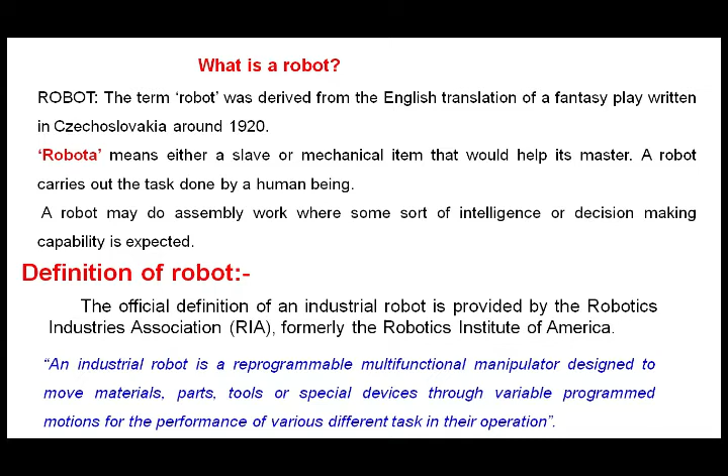This slide shows more definitions. Robot: any automatically operated machine that replaces human effort. It may not resemble human beings in operation, performance, or function in a human-like manner. By extension, robotics is an engineering discipline dealing with the design, construction and operation of robots.

One more definition: Robotics is the intersection of science, engineering and technology that produces machines called robots that substitute for human actions. The robot consists mainly of a mechanical arm tasked with welding or screwing on certain parts of a car. Today we see an evolved and expanded definition of robotics that includes the development, creation and use of robots that explore earth's harshest conditions, robots that assist law enforcement, and even robots that assist in almost every facet of healthcare.

Now I can explain the three laws of robots. These laws are applicable for designing a robot. These three laws of robotics were conceived in the 1920s by science fiction writer Isaac Asimov.

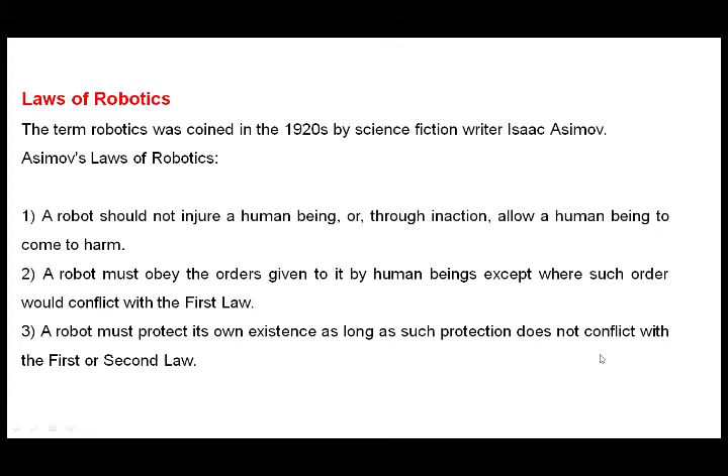Second law: a robot must obey orders given to it by human beings, except where such orders would conflict with the first law. Third law: a robot must protect its own existence, as long as such protection does not conflict with the first or second law.

What is the meaning of the first, second and third laws? The first rule is, if the job task is dull, dirty, difficult and dangerous, a human may not be able to do the job efficiently for hours. Therefore, the job is appropriate for automation or robotic labor.

The second law is the robot may not leave a human jobless; it must make our lives more enjoyable, not miserable. The third rule involves asking whether you can find people who are willing to do the job. If not, the job is for automation or robotics. These laws mean the use of robotics or automation must make short term and long term economic sense.

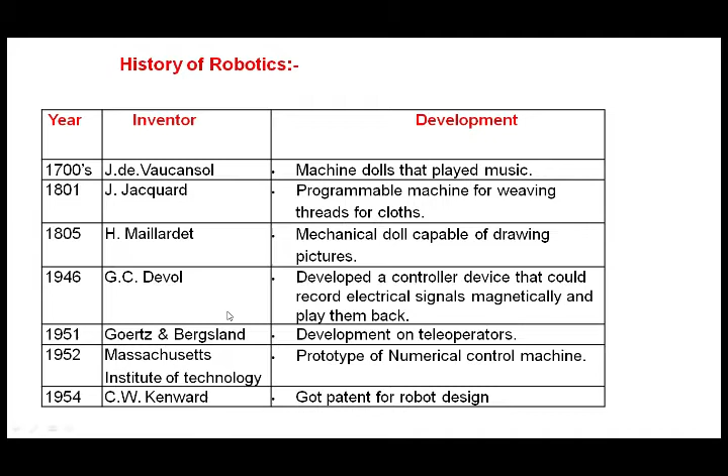This slide shows the history of robotics. In this table, inventor development is shown, explaining how the robot was designed with different specifications or upgrades done by different inventors from the 1700s to till date. You can observe the changes in the slide according to the years.

Next topic: anatomy of robot. What is the anatomy? Anatomy of a robot is also known as the structure of the robot, meaning what parts are there, external or internal. This arrangement or attachment of different parts is called anatomy. What parts are used in the robot is called anatomy.

The basic components or sections in anatomy of robot are as follows. The robot anatomy is concerned with the physical construction and characteristics of the body, arm and wrist, which are the base, fixed or mobile; the manipulator arm, which has several degrees of freedom; and the end effector or gripper, holding a part or tool.

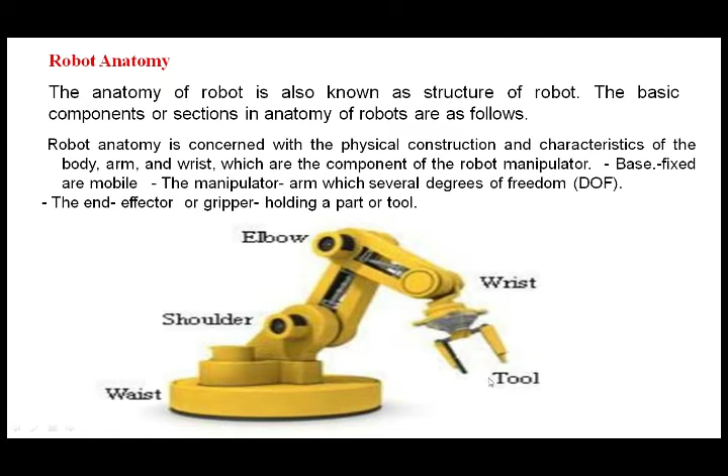In this figure, you can observe the different components visible: waist, shoulder, elbow, wrist, tool. Robot anatomy deals with the assembly of other components of a robot such as wrist, arm, end effectors, robot joints, manipulator, and kinematics. These parts are called robot anatomy.

First we discuss the 5 most important components. End effectors: the hand of a robot is considered as an end effector. The grippers and tools are the two significant types of end effectors. The grippers are used to pick and place an object, while the tools are used to carry out operations like spray painting, spot welding, etc. on a workpiece.

Robot joints. The joints in an industrial robot are helpful to perform sliding and rotating movements of a component. Next one is the manipulator. The manipulators of a robot are developed by the integration of links and joints. In the body and arm, it is applied for moving the tools in the work volume. It is also used in the wrist to adjust the tool.

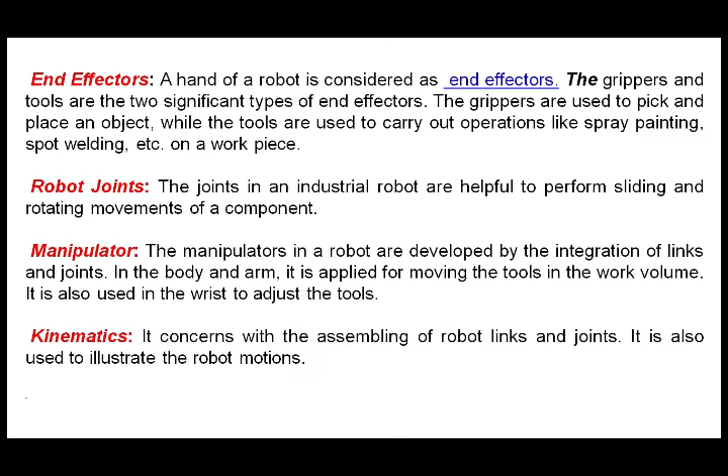One more definition: the manipulator is from the base up to the end effector. Whatever joints, links and parts are there, these assembled parts are called the manipulator. Kinematics. It concerns the assembling of robot links and joints. It is also used to illustrate the robot motions.

Next component, the locomotion devices. In the case of human beings, the power for the movement of the arm, the palm and fingers is provided by muscles. For the robot, power for the movement is provided by the motors. The motors used for providing locomotion in robots are of 3 types depending on the source of energy: electric, hydraulic, pneumatic.

Next component, the controller. The controller has both hardware and software and acts as a controller to the robot. The controller functions in a manner analogous to the human brain. With the help of these controllers, the robot is able to carry out the assigned tasks. The controller directs and controls the movement of the manipulator and the end effector. In other words, the controller controls the robot.

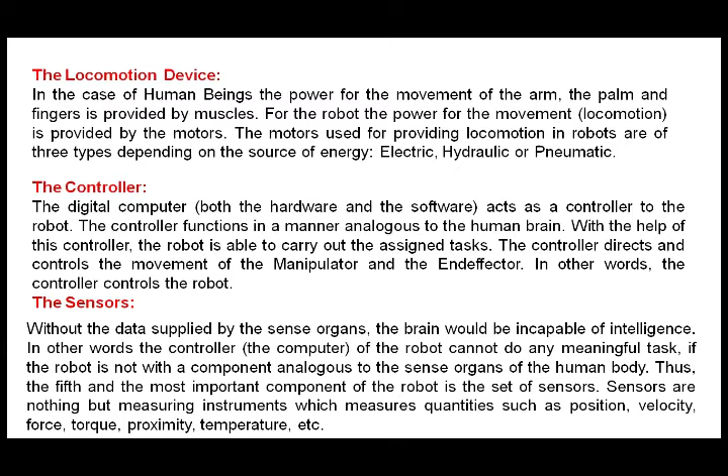Sensors. Without the data supplied by the sense organs, the brain would be incapable of intelligence. In other words, the controller of the robot cannot do any meaningful task if the robot is not equipped with a component analogous to the sense organs of the human body. Thus, the fifth and most important component of the robot is a set of sensors. Sensors are nothing but measuring instruments which measure quantities such as position, velocity, force, torque, proximity and temperature, etc.

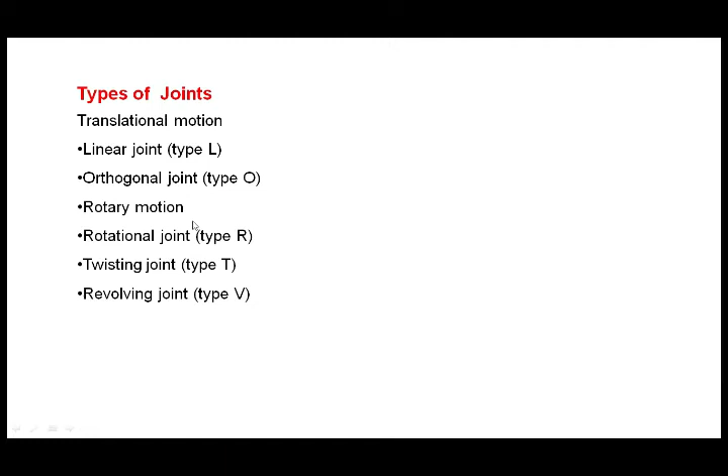Next components are the joints and links. This slide explains the different types of joints and links. First, what is the joint we discuss here? A joint provides the controlled relative movement between the input link and the output link. A robot link is the rigid component of the robot manipulator. Here: linear joint, rotary joint, rotational joint, twisting joint and revolving joint.

This slide shows the different types of joints. Practically all industrial robots have mechanical joints. They can be classified as the following types. The first one is the linear joint. In this linear joint, the relative movement of the input link and the output link is a translational sliding motion with the axes of the two links being parallel.

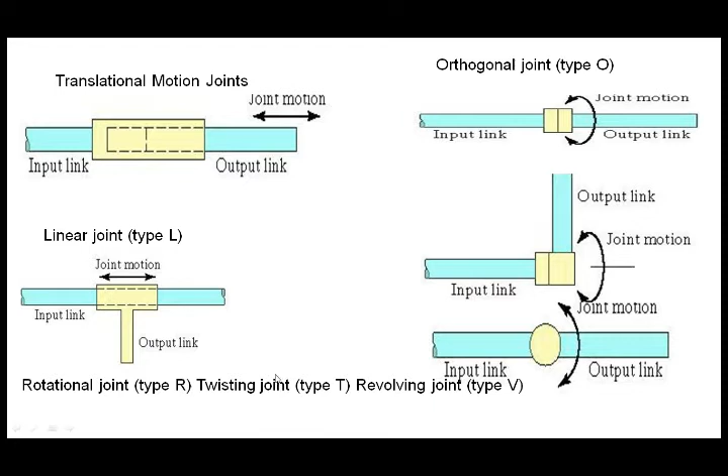This is the orthogonal joint. The input and output links are perpendicular to each other during the movement. Next, the rotational joint. This type provides a rotational relative motion with the axis of rotation perpendicular to the axes of the input and output links. Next, the twisting joint. This joint also involves rotary motion, but the axis of rotation is parallel to the axes of the two links. These are the different joints.

Next, different types of robots are used in the present scenario: first, industrial robot, laboratory robot, exploration robot, hobbyist robot, classroom robot, educational robot, tele robots, repeating robot. First we discuss what the industrial robot is. Industrial robots are further classified into three types: sequence robot, playback robot, intelligent robot.

First, industrial robots are used in the industrial manufacturing environment. Usually these robots are articulated arms specifically developed for such applications as welding, material handling, painting and other types of operations.

Next one, laboratory robot. Laboratory robots are used in biology or chemistry labs, for example with pharmaceutical components, and to move biological or chemical samples.

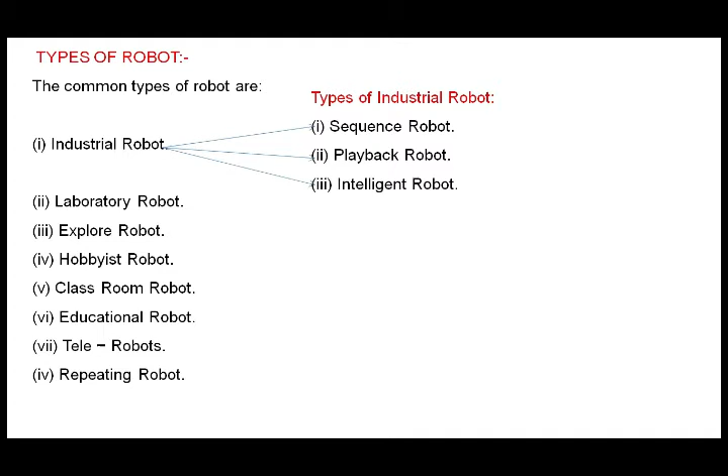Telerobotic. Last one is the telerobotics. The technical term for the remote control of a robot is telechir. In a telerobotic system, a human operator controls the movements of a telechir from some distance.

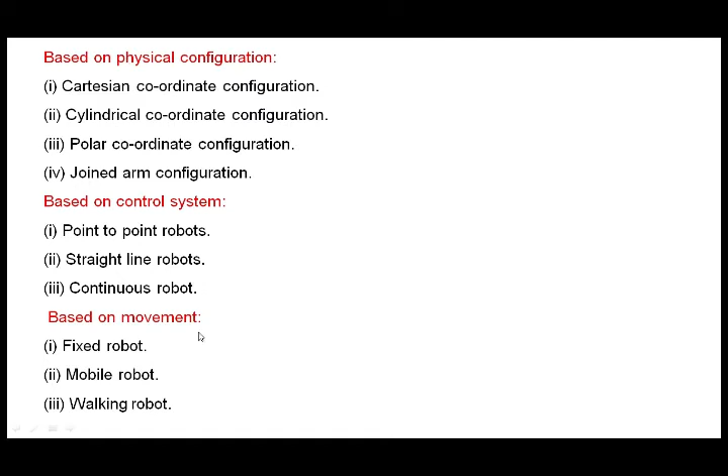Next, based on physical configuration, robots can be classified as 4 types: Cartesian coordinate configuration, cylindrical coordinate configuration, polar coordinate configuration, jointed arm configuration. Based on control system: point to point system, straight line system and continuous robot. Based on movement: fixed, mobile, walking robot.

Based on type of drive, 3 types of drives are there: pneumatic, electric, hydraulic. Based on sensory systems: intelligent robot, vision robot, simple and blind robot. Degrees of freedom: single degree of freedom, 2 degrees of freedom, 3 degrees of freedom, 6 degrees of freedom. Based on application: manufacturing, handling and testing. Based on path control: stop to stop control, point to point control, controlled path, continuous.

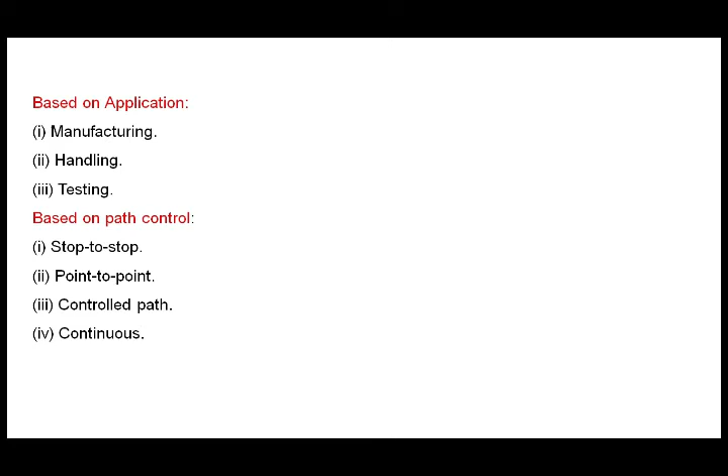Next, robot specifications. The common robot specifications are given as below: spatial resolution, accuracy, repeatability, compliance, pitch, yaw, roll, joint notation, speed of motion, payload. First we discuss spatial resolution. Spatial resolution of a robot is the smallest increment of movement into which the robot can divide its work volume. The spatial resolution depends upon 2 factors: control resolution and mechanical resolution.

Next we discuss accuracy. Accuracy refers to the robot's ability to position its wrist end at a desired target point within the work volume. The accuracy of a robot can be defined in terms of spatial resolution because the ability to achieve a given target point depends on how closely the robot can define the control increments for each of its joint motions.

Next, repeatability. Repeatability is concerned with the robot's ability to position its wrist or end effector at a point in space that had previously been taught. Repeatability refers to the robot's ability to return to the programmed point when commanded to do so. Repeatability errors form a random variable and constitute a statistical distribution.

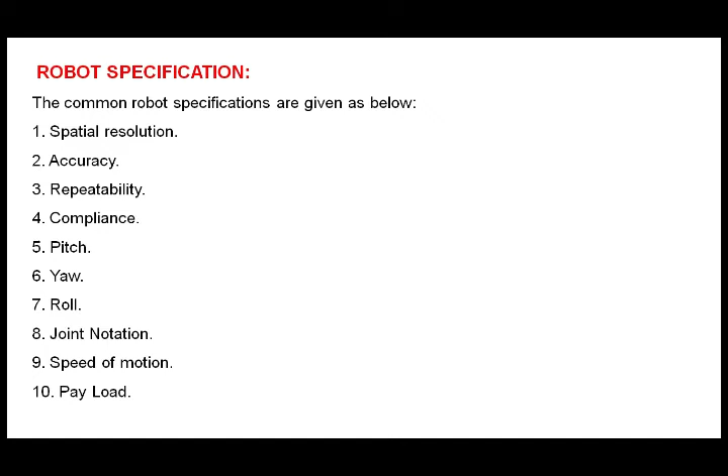Next, last specification, payload. The size, configuration, construction and drive system are determined on the basis of the load carrying capacity or payload of the robot. The load carrying capacity is specified with the robot's arm in the weakest position. For polar, cylindrical or jointed arm configurations, the robot arm is at maximum extension.

Next, we discuss types of robot arms, or functional line diagram representation of robot arms. Based on basic physical configuration, robot arms can be classified into 5 types of configurations. First, polar coordinate configuration, cylindrical coordinate configuration, Cartesian coordinate configuration. Fourth is jointed arm configuration. Fifth, selective compliance assembly robot arm, SCARA. SCARA means selective compliance assembly robot arm.

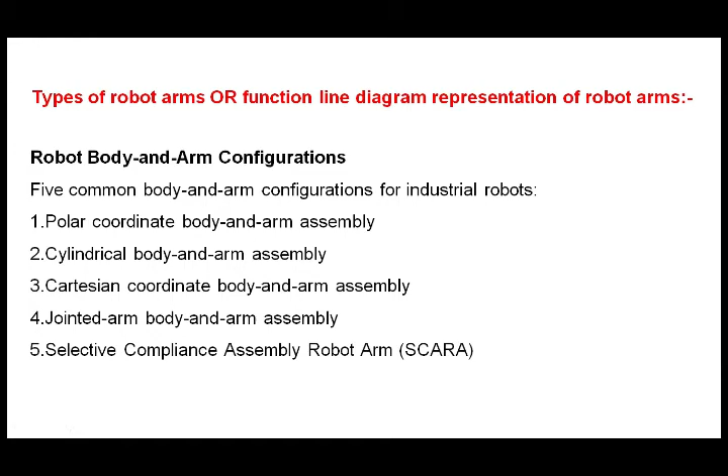This configuration will possess an arm with up and down movement. It comprises a rotational base along with a pivot. It has 1 linear and 2 rotary joints that allow the robot to operate in a spherical work volume. This system has 1 linear and 2 angular motions. In this figure you observe the directions: linear motion or angular motion, rotational, up and down.

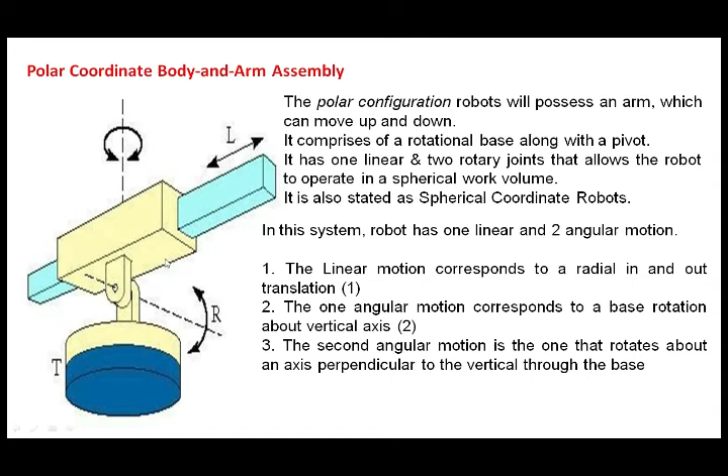Examples of polar coordinate configuration: Unimate 2000 series robot. Advantages: simple and smaller in design, easily applicable for commercial purpose, less space is enough for its installation, high capability. Next, applications: used for machine loading and unloading operations, wafer etching application in electronic industry, forging, injection molding. These are the advantages and applications of polar coordinate configuration.

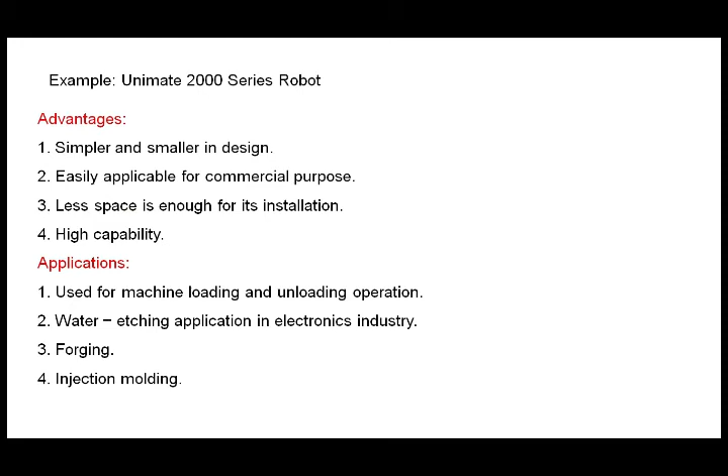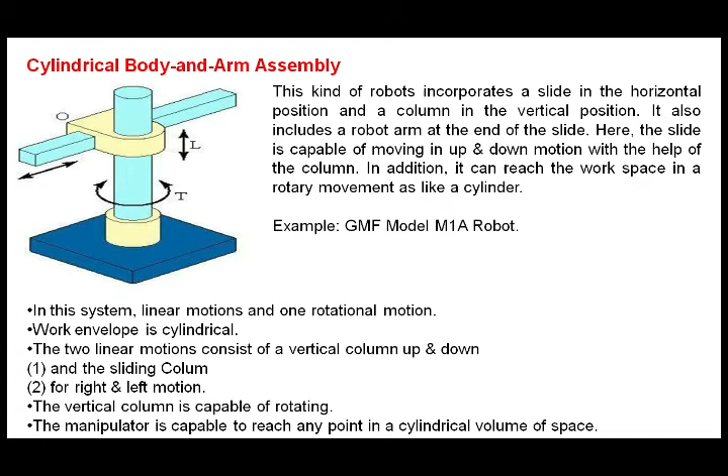In addition, it can reach the workspace in a rotary movement like a cylinder. Example: GMF model M1A robot. This cylindrical configuration has two linear motions and one rotational motion. Work envelope is cylindrical. Two linear motions consist of vertical column up and down and one sliding, and the second one is left and right motion. The vertical column is capable of rotating. The manipulator is capable to reach any point in a cylindrical volume of space.

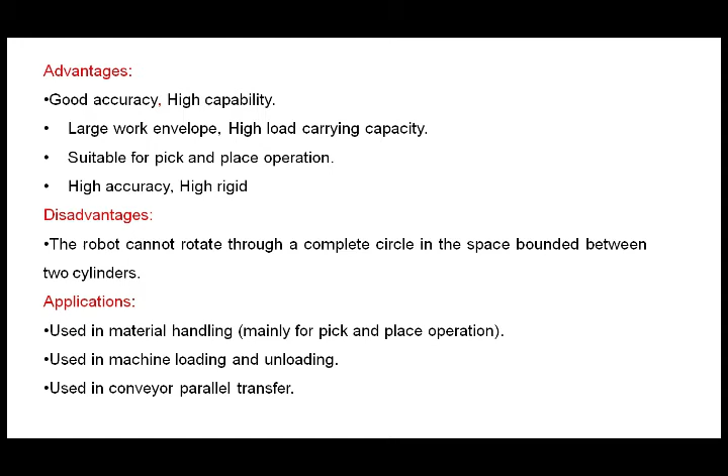Advantages of cylindrical coordinate configuration: good accuracy, high capability, large work envelope, high load carrying capacity, suitable for pick and place operations, high accuracy, high rigidity. Disadvantages: the robot cannot rotate a complete circle. It means it cannot rotate 360 degrees. So, applications: used in material handling mainly for pick and place operation, used in machine loading and unloading, used in conveyor pallet transfer.

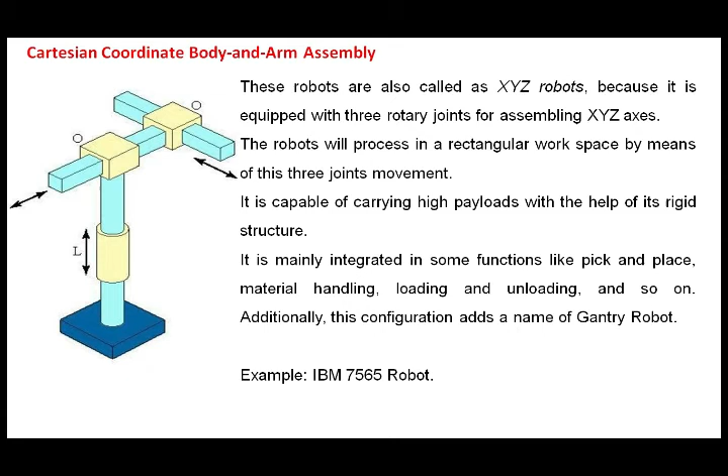This Cartesian configuration system has three linear motions. What are the three linear motions? X, Y and Z. X coordinate axis represents left and right motions. Y coordinate axis represents the forward and backward motion. Z coordinate axis represents the up and down motions. Motion in any coordinate is independent of the other two motions. The manipulator can reach any point in a cube or rectangular volume of space.

The robots which use the Cartesian coordinate system are called rectilinear or gantry robots.

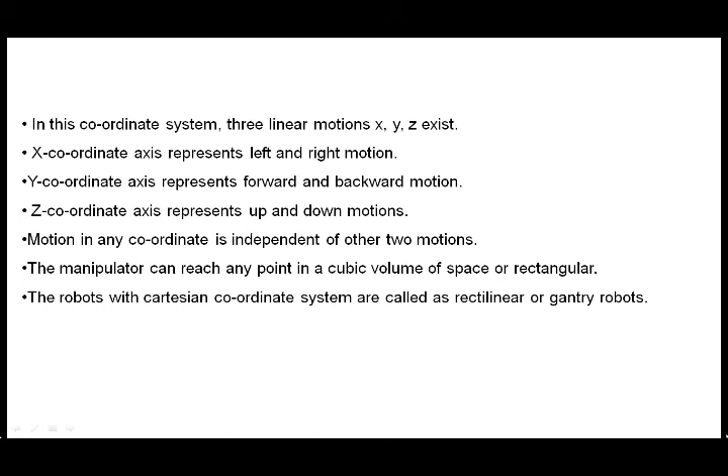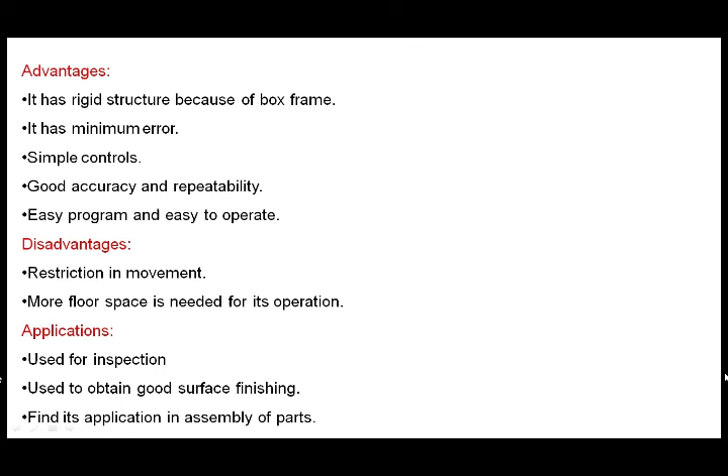Advantages of Cartesian configuration: it has a rigid structure, box frame, minimum errors, simple controls, good accuracy and repeatability, easy to program and easy to operate. Disadvantages: restriction in movement. More floor space is required for its operation because it has three axes of motion, 3 degrees of freedom, x, y, z. Applications: used for inspection, used to obtain good surface finish, and in assembly of parts.

How many degrees of freedom are there in the jointed arm configuration? What are the degrees of freedom of the human arm? Same here also. Examples: Cincinnati Milacron T3776 robot. The jointed arm configuration is also called the anthropomorphic configuration. Jointed arm configuration is nothing but a design that corresponds to the human arm, having wrist, shoulder, elbow.

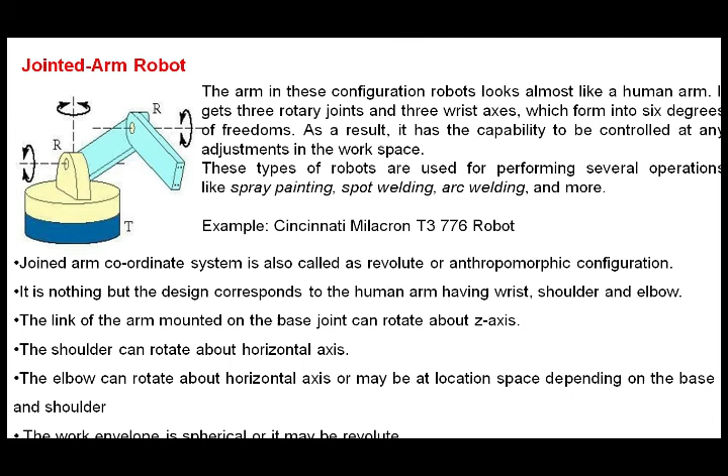The link of the arm is mounted on the base joint that can rotate about the z axis. The shoulder can rotate about a horizontal axis. The elbow can rotate about a horizontal axis, or maybe at a location in space depending on the base and shoulder. The work envelope is spherical or it may be revolute. Advantages of jointed arm configuration: it can occupy a large work envelope. It is flexible to reach, increased flexibility, huge work volume and quick operation.

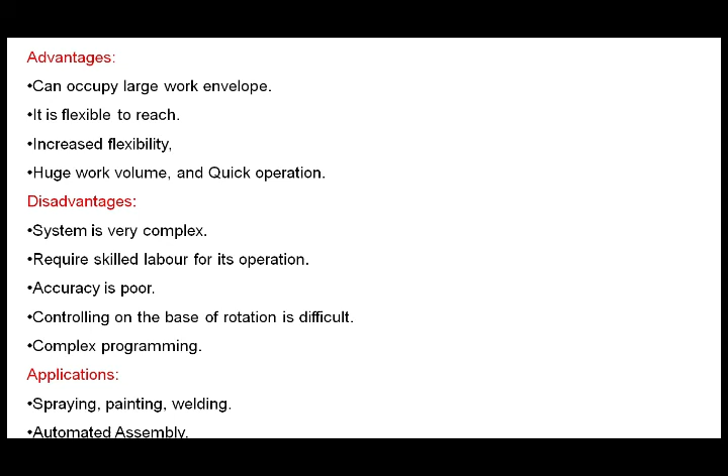Disadvantages: the system is very complex, requires skilled labor for its operation, accuracy is poor, control on the base of rotation is difficult, complex programs. Applications are: spraying, painting, welding, automated assembly.

Next, the last configuration. This is the SCARA robot. It's a very important configuration. SCARA stands for Selective Compliance Assembly Robot Arm or Selective Compliance Articulated Robot Arm. This robot was developed under the guidance of Hiroshi Makino, a professor at the University of Yamanashi. The arms of SCARA are flexible in the XY axis and rigid in the Z axis. That makes it able to fit into holes in the XY axis.

In the XY direction, the arm of the SCARA robot will be compliant and strong in the Z direction. This is due to the virtue of SCARA's parallel axis joint layout, hence the term selective compliant. This robot is used for various types of assembly operations, that is, a round pin can be inserted in a round hole without binding using this.

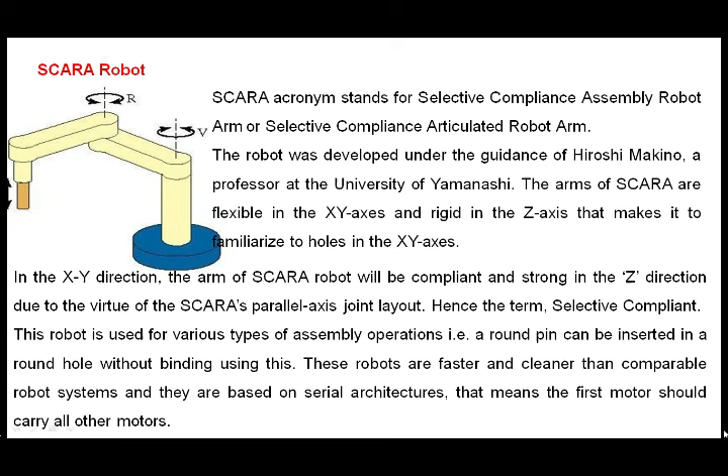These robots are faster and cleaner than comparable robot systems. They are based on serial architectures. That means the first motor has to carry all the other motors. Advantages of SCARA configuration: high speed capabilities, performs great in short strokes, fast assembly, pick and place applications. It has a donut shaped work envelope.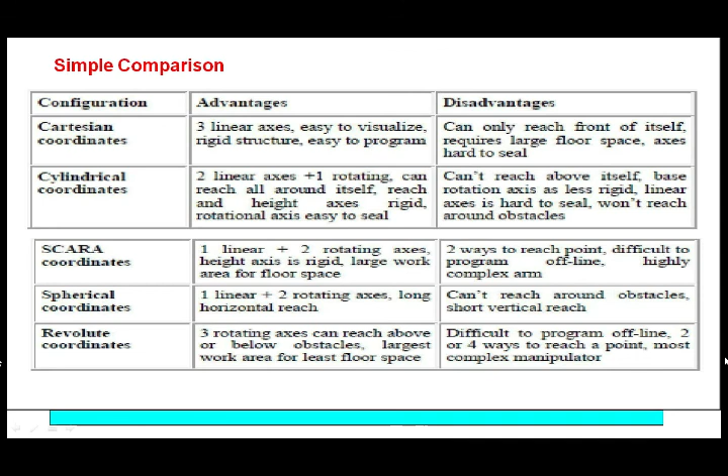Spherical coordinate configuration: one linear plus two rotating axes, long horizontal reach. Disadvantages of spherical coordinate configuration: cannot reach around obstacles, short vertical reach. Revolute coordinates: three rotating axes, can reach above or below obstacles, largest work area for least floor space. Difficult to program offline, four ways to reach a point, most complex manipulator. These are the comparisons of physical configurations.

Next we discuss degrees of freedom. The robot has 6 basic degrees of freedom. What are the 6 degrees of freedom? First, they provide the robot the capability to move and perform predetermined tasks. These 6 degrees of freedom are intended to follow the versatility of movement possessed by the human arm. The 6 basic motions consist of 3 arm and body motions and 3 wrist motions.

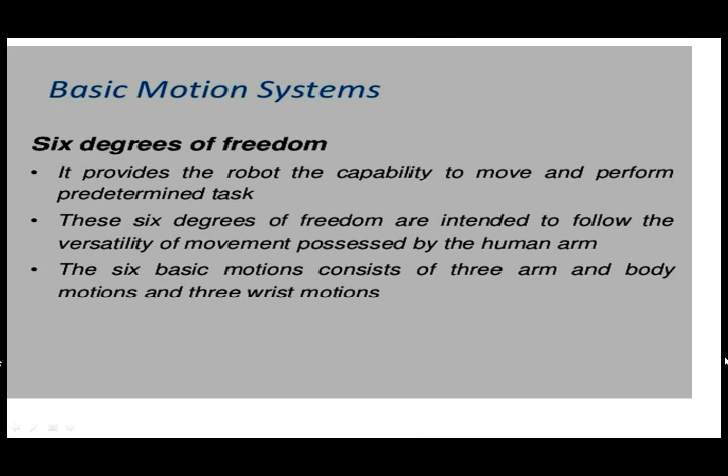First we discuss the 3 arm and body motions. First one is vertical traverse, second radial traverse, and rotational traverse. This slide shows the first, rotational traverse. This is the arm and body movement. The rotational traverse is the movement of the arm assembly about a rotary axis, such as left and right swivel of the robot's arm about a base.

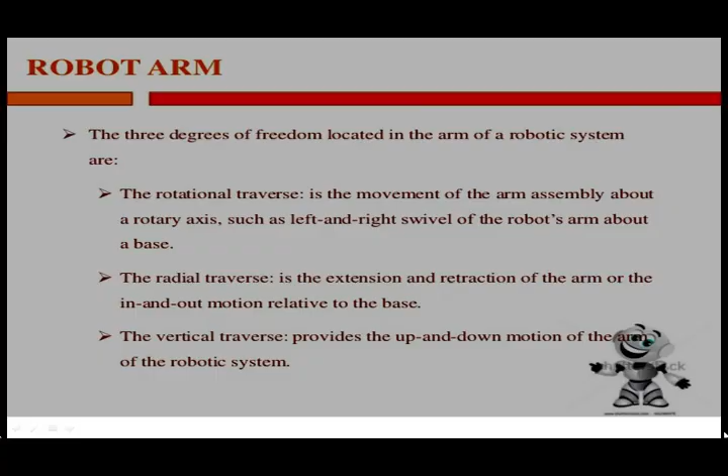The radial traverse is the extension and retraction of the arm, or in and out motion relative to the base. Third one is vertical traverse. It provides the up and down motion of the arm of the robot system. Next, 3 degrees of freedom of the wrist. The wrist is an assembly attached to the end of the arm. The end effector is attached to the wrist assembly. The function of the wrist assembly is to orient it. The body and arm determine the global position of the end effector.

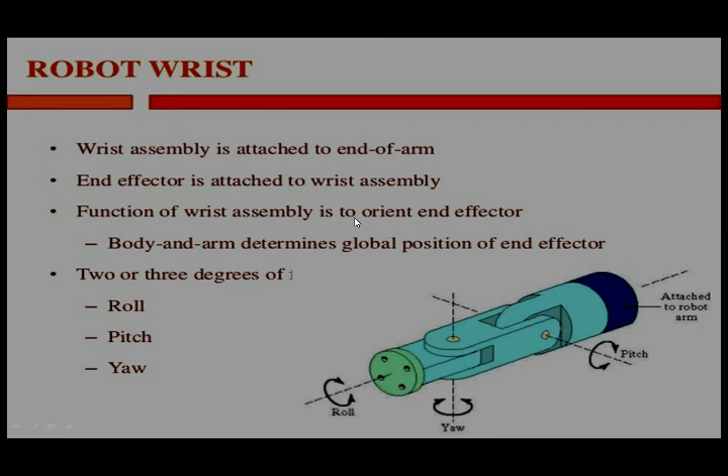3 degrees are there: wrist roll, pitch, and yaw. This slide has a figure. This figure shows the pitch and this is the roll. Roll means our wrist rotates; 3 degrees of freedom. Here also the same. Pitch means up and down, and yaw means left or right. These are the 6 degrees of freedom of a robot.